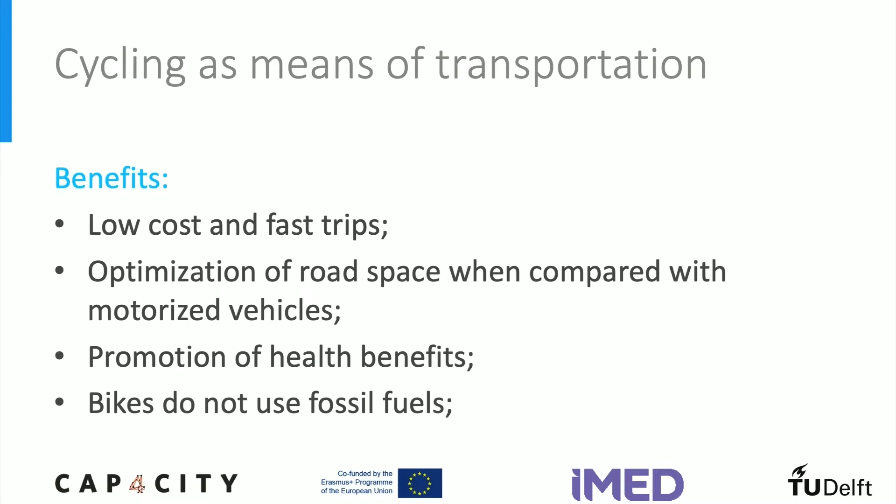Thus, promoting utilitarian urban cycling is one of the main strategies related to urban mobility with potential for improvement in the social, economic, and environmental aspects of urban contexts, contributing to city sustainability. However, in cities with car-oriented design, which are almost predominant in Latin America, safety concerns due to interactions with motorized traffic are one of the main obstacles to boost bicycles as a means of regular transport. In these cases, the creation of road infrastructure dedicated to cyclists, separating them from intense motorized traffic, is one of the main strategies to start increasing the attractiveness of this mode.

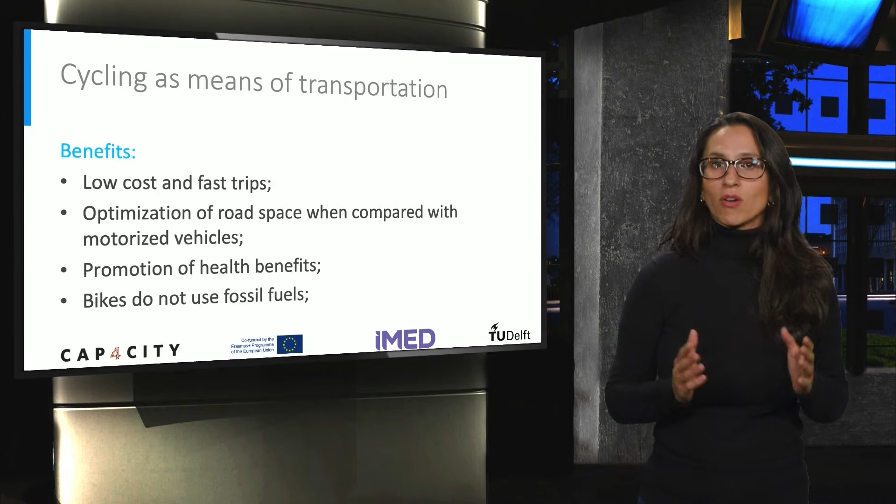In this video, we present the guidelines to develop a cycling infrastructure network to increase the attractiveness of bike use. After this lecture, you are expected to identify the different types of cycling infrastructure and understand in which context they might be used.

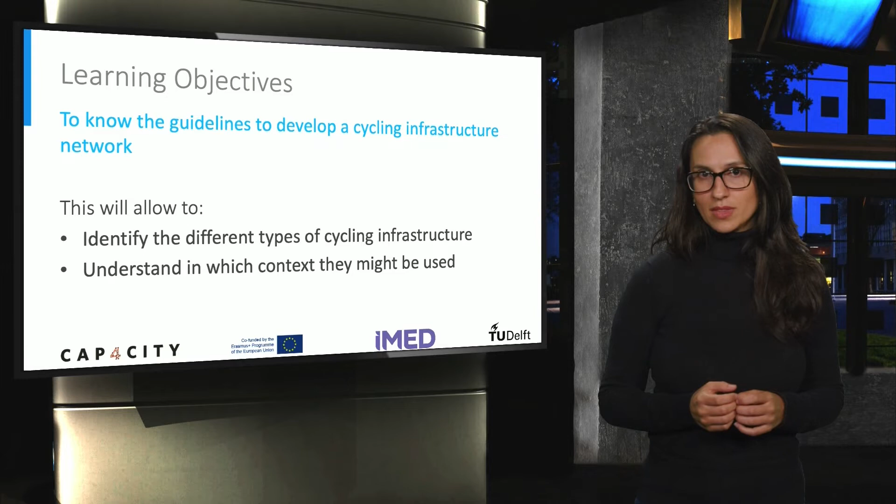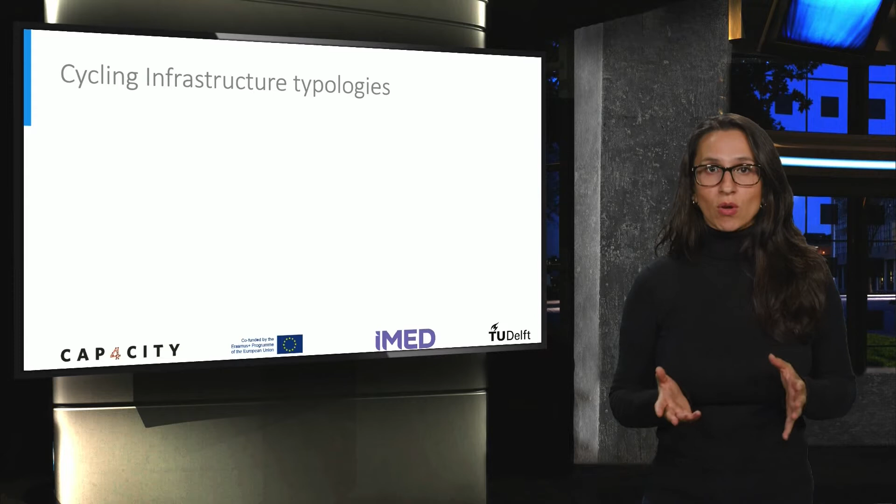Among the types of lanes dedicated to the use of bicycles, they can be categorized by the separation level from motorized traffic. The most common are shared lanes, cycle lanes, and cycle tracks. Shared lanes are constituted as shared roads with signs indicating the priority of bicycles in relation to the vehicles, while cycle lanes are a part of the track intended exclusively for the circulation of bikes and delimited only by signaling. Finally, the cycle tracks are the type of infrastructure with physical separation from motorized traffic.

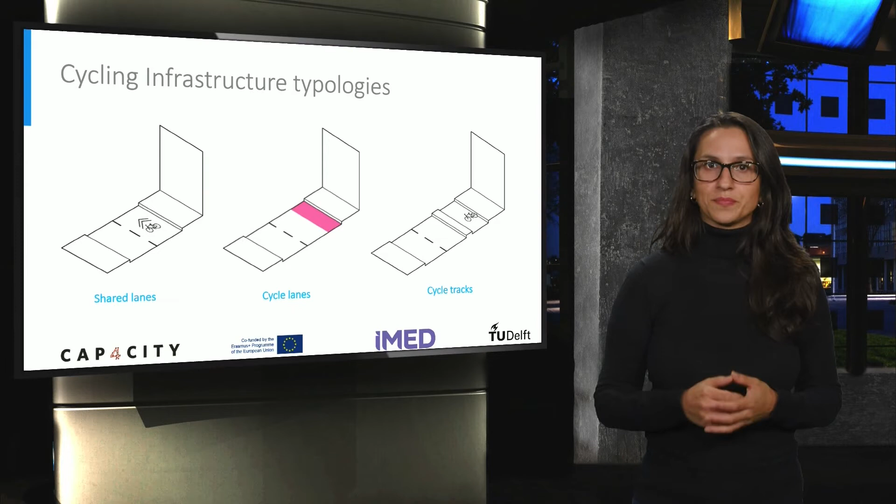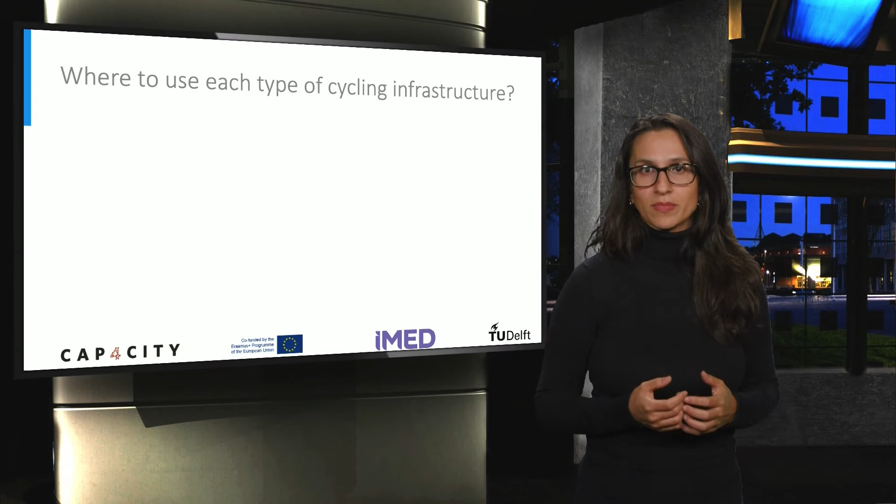Which type of cycle infrastructure should be installed in each context depends mostly on the flow and the speed of the automotive traffic on the street. Essentially, the strategy consists in increasing the level of separation of cycling infrastructure where motorized traffic is intense and speed limits are high. Following these rules, shared lanes might be installed on streets with low vehicular flow and speed, such as local streets in residential areas. Bikes and cars can share the street space.

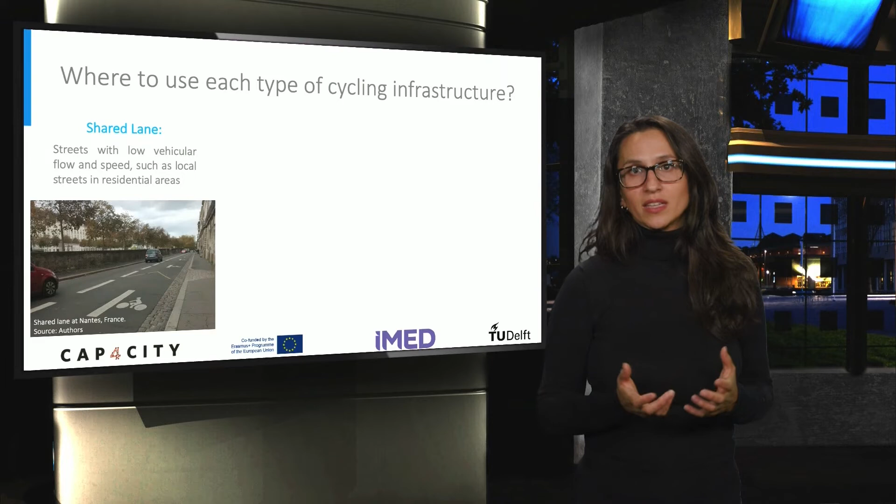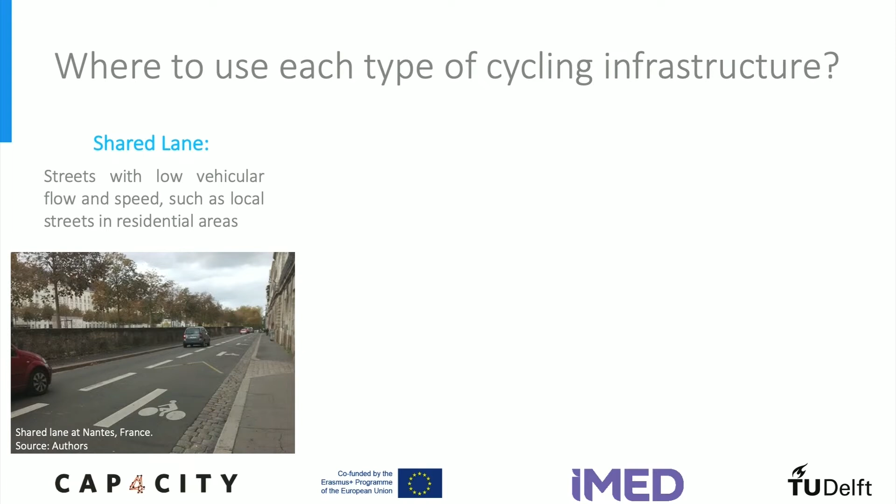Bike lanes on streets where the quantity or speed of cars may present risk or limit cyclist movement; lanes may be separated by horizontal signs without physical barriers. And cycle tracks where motorized traffic is intense and with high speeds, such as main streets or avenues; it is recommended that cycling infrastructure should be physically separated from the motorized traffic for safety reasons.

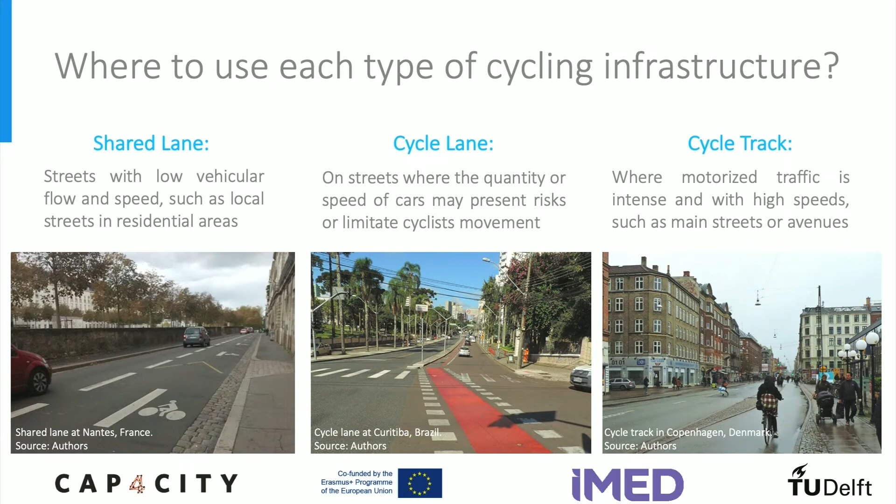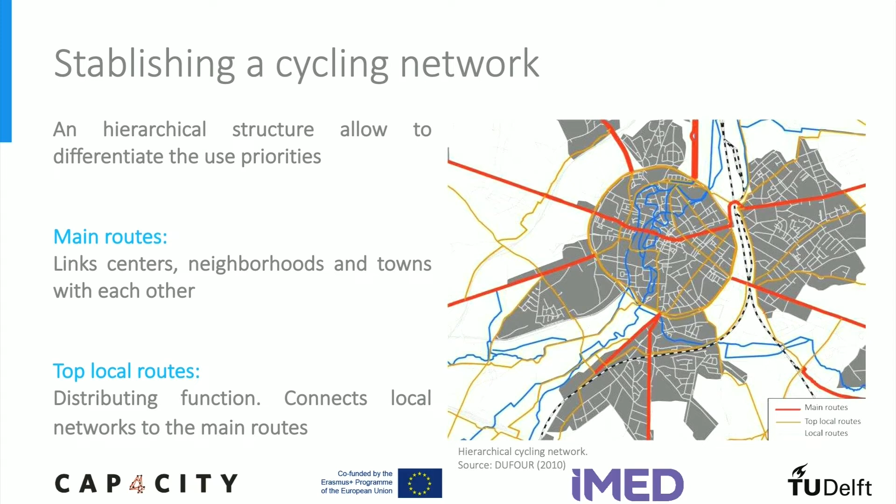The cycling network formed by the assembly of lanes dedicated to bicycle circulation must present high levels of connectivity and comprehensiveness of the urban space, to provide great accessibility of the urban territory and allow the cyclists to choose between interconnected routes. Also, the cycling network shall have a hierarchical structure that allows differentiating the use priorities according to the distance of the trips and the fluidity to be provided.

The hierarchy can present two categories. Main routes provide connection within the city and peri-urban areas, linking centers, neighborhoods, towns, and cities with each other. Top local routes have a distribution function within the urban network, providing connectivity to the main routes from local networks. Together with the local streets network, which doesn't necessarily need to have a cycling infrastructure, the cycling network should provide accessibility to any place in the city.

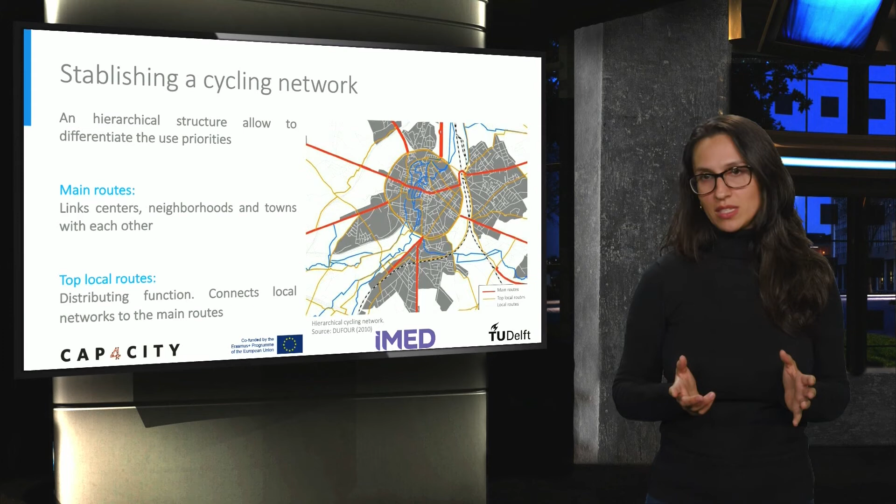For the success of a cycling network, there are 5 principles that might be taken into consideration: cohesion, directness, security, comfort, and attractiveness. Cohesion. The cycling infrastructure must form a coherent network, promoting connectivity between the different neighborhoods and land uses, integrating the cycle with other modes of transport, and providing accessibility to the different urban spatial contexts: center, peripheries, historic areas, recent developments.

Directness. Cycling infrastructure must provide the fastest routes for cyclists, consider all travel time and cost, and minimize detours and waiting. Security. The cycling infrastructure must minimize the potential, real and perceived, of accident risk. Thus, in addition to providing safety to cyclists, it must make them feel safe. The perceived risk is one of the key barriers to cycle use and therefore must be minimized to encourage new adherents to cycling.

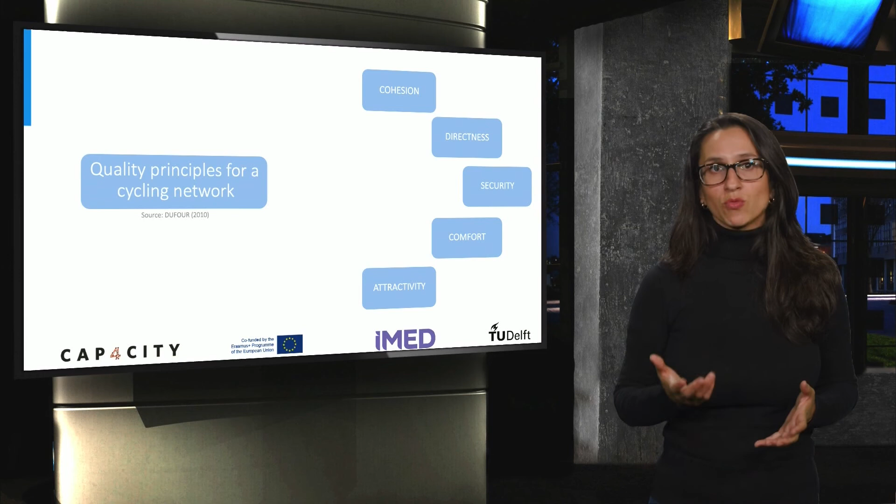Comfort. The infrastructure must minimize the physical and psychological stress to cyclists, providing fluidity in the movement and avoiding the need for complex maneuvers. Attractiveness. The cycling network must be designed considering the surrounding areas and, where possible, enhancing their positive aspects. In this regard, the treatment of sensory properties provided by the route, such as lighting, personal safety, visual and environmental quality, must be considered.

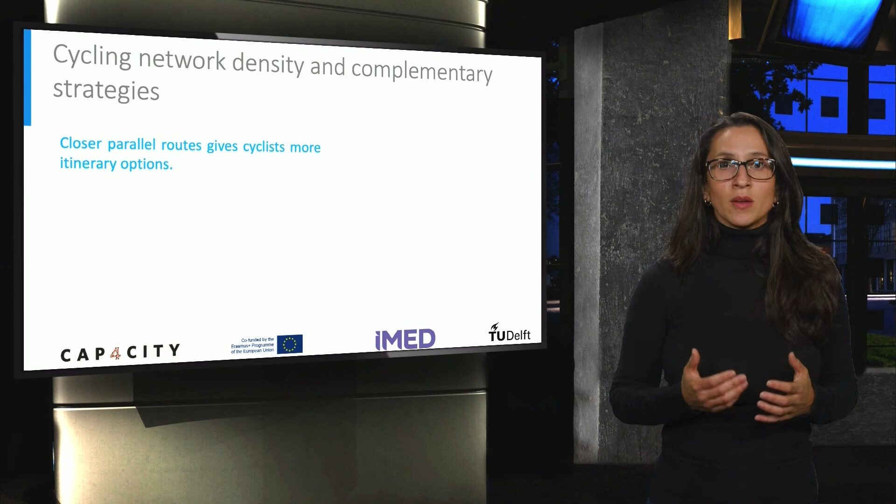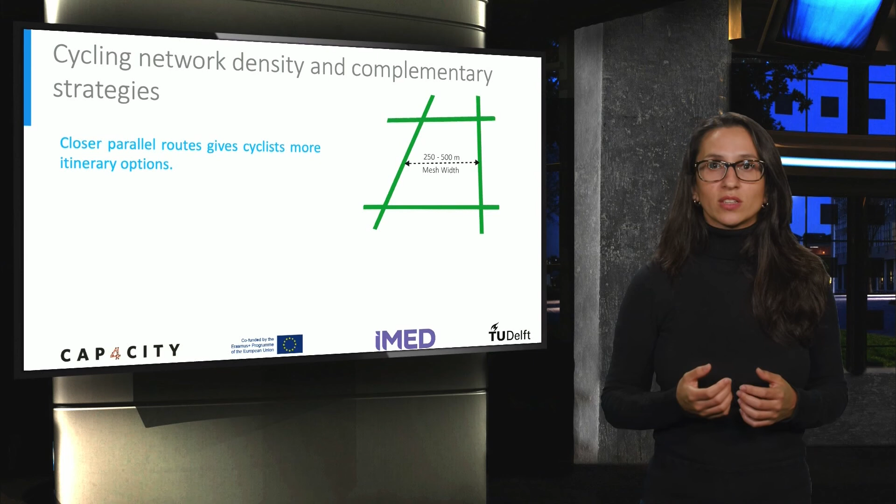Another factor that influences the quality of a cycling network is mesh width, measured by the distance between parallel routes. Closer parallel routes imply a denser network, giving cyclists more itinerary options. Different mesh width recommendations can be found in the literature, varying between 250 meters and 500 meters.

In addition to the creation of specific road infrastructure for bikes, implementing restrictive measures for car use, lowering the speed of motorized traffic, and integrating cycling with public transportation also contribute to the convenience and safety of bicycle traffic and encourage the adoption of this sustainable transport mode.

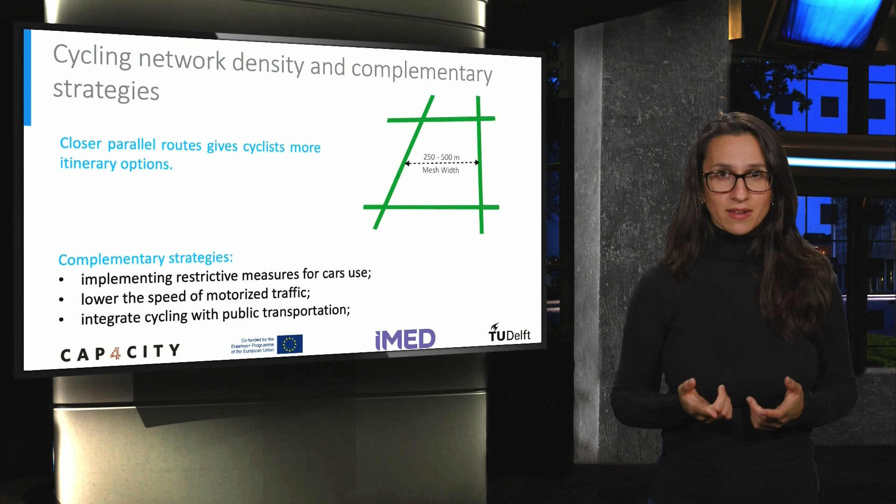Now that you have understood the importance of cycling infrastructure to promote the use of bikes as a means of transportation, let's talk about the city where you live. Is there a cycling infrastructure network there? Let's compare different contexts on the discussion forum.